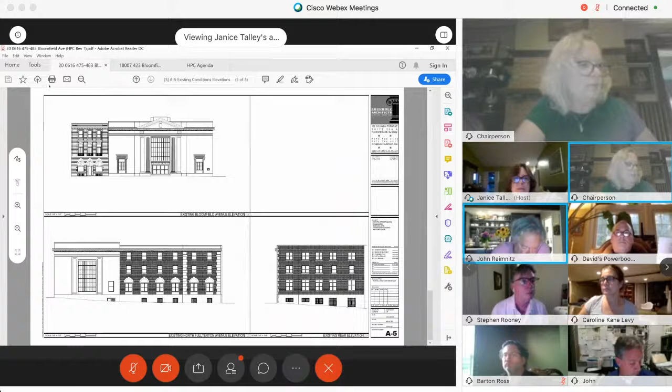is HPC application 2020-14, which is 475 and 483 Bloomfield Avenue. This is a door and window replacement, new awnings, exterior facade lighting, and signage.

Now, we are reviewing this because these two buildings are within the town center historic district, which is basically our downtown Bloomfield Avenue corridor. I just want to make a brief discussion of the building, the significance of the building. As I said, there's two buildings.

The picture on the upper left, the building to the left with the strong horizontal lines is 483 Bloomfield Avenue, and the building on the corner is 475 Bloomfield Avenue.

So 475 Bloomfield Avenue was built originally, was known as the Montclair Trust Company, as identified in the Montclair Times from articles dating the beginning of 1910. So we know that it was constructed in 1910.

The building significance that is in the report is based on new research, and this is what's come of that. So what you see here is not true. It's not correct, let me put it that way.

Going back to the Town Center Historic District nomination report from 2002, it's identified as a 3-story neoclassical structure. And surprise, surprise, it was not designed by York and Sawyer, but by Mowbray and Uffinger, who were responsible for the Dime Bank in Brooklyn. It was constructed in 1910, according to newspaper articles, and is characterized as a contributing building within the Town Center Historic District.

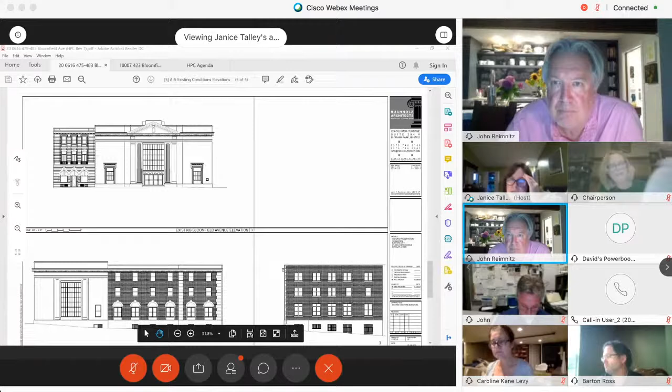Are you talking about Tom Conley's memorandum? Oh wait, I have to unmute. Are you talking about this, member?

Yes, okay. So I just want to point out something else within this memorandum, on page 2, the second paragraph. It says this property was previously approved for replacement windows by the HPC Commission under application 2010-63. A copy of the certificate is attached to this memo.

But I'd just like to point out and have it on record that the commission's decision was to deny the application without prejudice, in a vote of 6, that voted to deny the application.

Basically, what it was about the windows, and the chairperson at that time said that they were not denying the idea of replacing the windows, but the information submitted was incomplete and wrong, and that the commission in 2010 was asking about steel windows as opposed to aluminum windows. So that's in a nutshell what the previous application was.

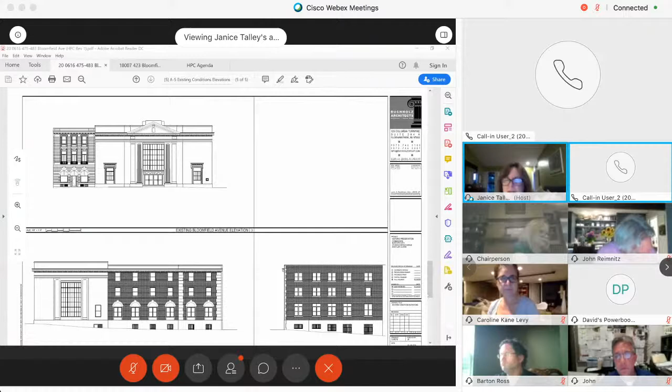I'm maybe here, I don't know if Jen, you can hear me. Who's that? That's David Genova. Yeah, okay, I hear you, David. I'm listed on here as call-in user 201 if you need to mute or unmute me. I'm on my phone, and also on the computer so I can see, because my computer doesn't have a microphone.

Okay, is the architect here, David? Yes, can you hear me? Yes. Can you identify yourself, John? Hi, yes, I'm John Buchholz, the applicant's architect. Do we have anyone else that's going to be testifying for this applicant? No. Okay, so Mr. Hyman, could you swear in the witnesses?

I can do, I have him muted. Hold on.

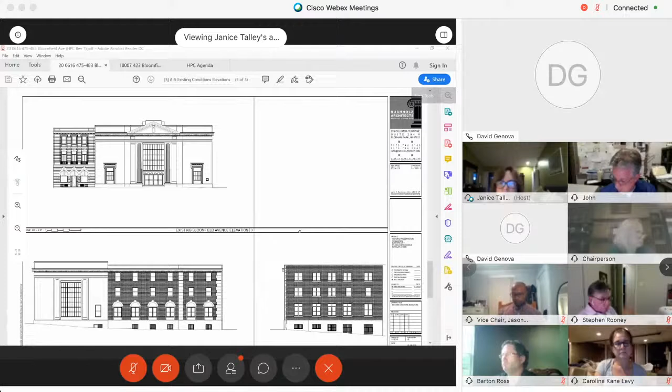So the intent of this plan, and Janice, we will certainly pick up the use conversation, but the intent is to create entryways for people going specifically to the various uses associated with this building. The entryway on North Fullerton is to service the office component of this building.

The facade upgrades on 475 are similar to the facade upgrades on 483, both in terms of style. We wanted to keep the buildings somewhat connected as they have been historically, but also in terms of overall aesthetic and what we were trying to accomplish. We're trying to make the building a little bit more attractive to users that aren't a bank. It's a very specific bank building, and we're going to have to train tenants to not think of it as a specific bank building.

But we are very sensitive to the historic qualities of the building, and certainly the beautiful windows, facade, and stonework. Our intent was not to bastardize those things in any way, not to dismantle anything or come in with anything too aggressive. So that's just the broad overview of our plan and intent. I will let John Buchholz, our architect, go over specifics on each. If we want to start at 483, John, I think that's a good place to start, unless anybody has any questions for me.

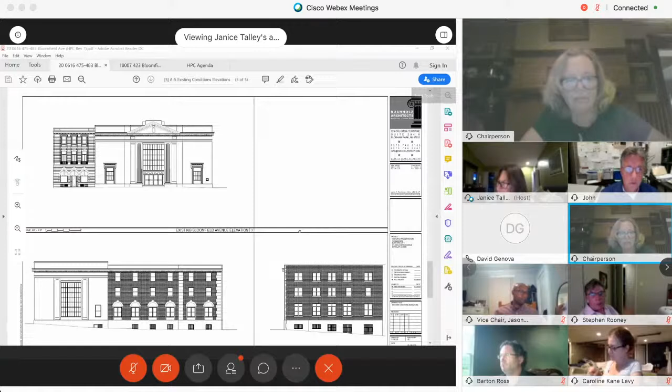Can I just interject? Thank you for the overview. I think it's very important to have that when we look at this, and it's exciting to see this property being thought of. I think the overall look will be very good. But I just want to make sure the commissioners know that we are only looking at the facade of this, the exterior, and how the different things they plan to do will fit in with the historic district. So with that, maybe Mr. Buchholz can start with your plans for the building at 483.

Sure, absolutely. Thank you very much. This building, being the one off to the left, 483, our intention is to restore what's there and change out, as David said, the windows. The upper portion of the building has great historic detail, which we plan to clean - that limestone at the top is very dirty. Our plan is to clean all of that stone with specific chemicals so as not to damage it or do anything harmful. We are also looking to replace the windows.

We have details in here of the Andersen 400 windows, which are a clad product, and provide the wider mullions within the windows. The panels that are below or above them are going to match the windows that are there.

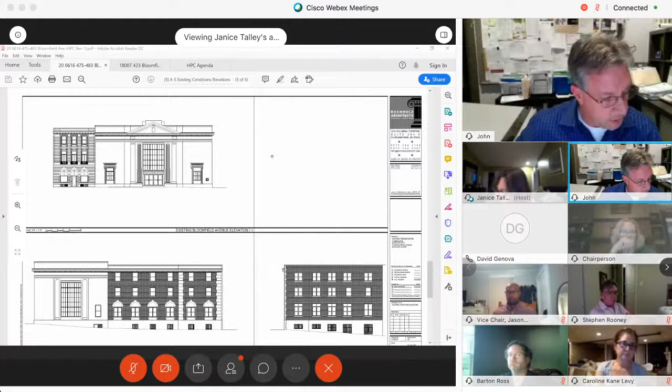Our plan is to also wash the granite base that sits at the bottom, which is very similar in color to the building above. We have similar black iron grills on the lower level windows that bring light into the lower portion of the building. Those will be scraped, repaired, and painted black as well.

So there's really not much more to the facade. It's pretty straightforward: upper stone, granite base, windows and doors, and the black iron are the pieces that will be restored and brought back to their original luster.

Thank you. Janice, do you have a close-up of that building? Is there one in the plan you could show? I think there's a picture that was part of this. Let's see, A3 has a photo. Would that help, the photo itself? Did you want the renderings, or A3 has a picture, Janice? All right, let me get to page A3.

Did you submit your plans on separate pages? Is that it? Corey from my office sent it. I don't think so, it's noting 5 of 5. It seems that when I uploaded what was sent, it's just one page, 5 of 5. No, this is the only one, definitely. Oh, there we go, I got it, definitely more than one page. I got it, okay, sorry. All right, so this is page 1, I was at page 5. So which page do you want me to go to?

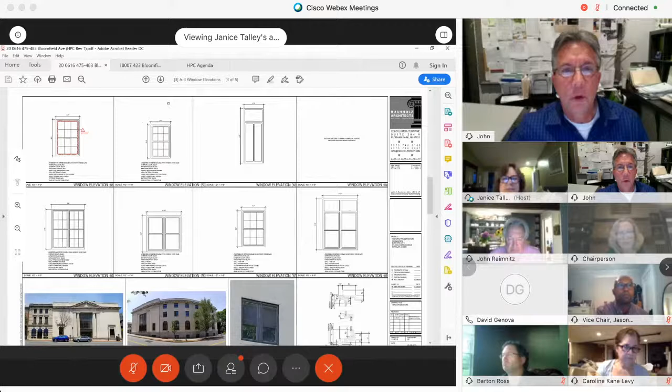It's probably 3. There we go, let's go one more. There you go, see the picture to the lower left. Does that help? Well yes, that's the current situation, correct? Can you make that, blow that up, Janice, at all? Yep, I can. Let's see, right. Do a dynamic zoom, all right, thank you.

And then you just roll your... that went the wrong way. How do I get out of dynamic zoom? Oh, now we all miss the easels. Yeah, there we go, well my computer got a little stuck there. I'm on page 4, we want to go back to page 3.

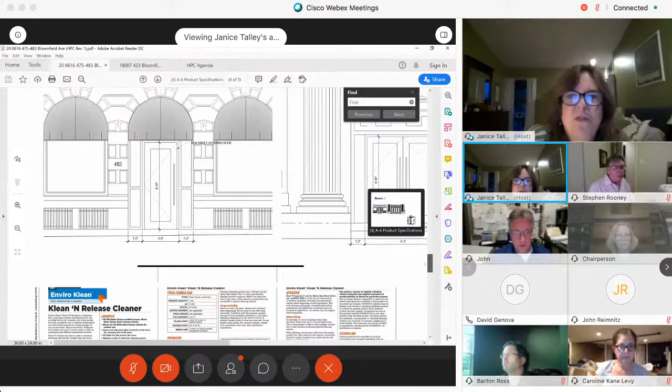This is the actual drawing. Wait a minute, that was a blow-up for a second. Can you go back, Janice? This might help, I think. Is that the chairman asking the questions from before? Yes. To get to page right here, 4, do you see on the bottom there? Chairman, does that help what you're looking for? Well, I thought we should be able to see the whole facade up on the top right. Up, Janice, it was on the top.

There you go, okay. Is there any way, dare I ask? I think you've been spoiled with Graham. I think it's the best I can do.

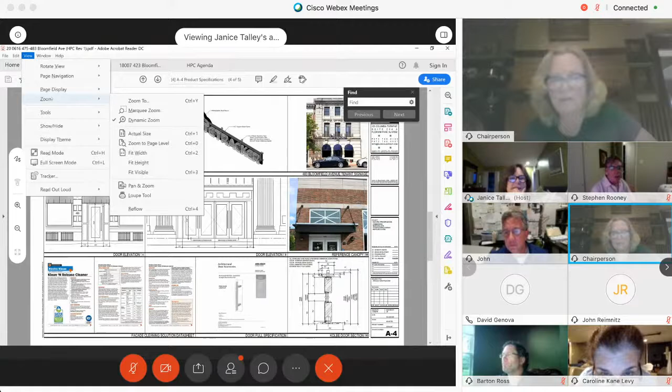Okay, well if everyone can look at this and then maybe look at the renderings that were sent, because we do have those in large format. I have the renderings, I can pull up any of the renderings. Well, this is part of what the renderings were, the plan. Maybe that's better, Janice. Okay, yeah, yes.

Do you have anything else to add to your testimony? No, I think that generally includes the Sitetracker sign as you see it, which resides between the first and second floor, and we kept a uniform line across both buildings. We're providing an uplight, an LED light below the main upper molding, running at the same level between the buildings to uplight that cornice. Other than that, Chairman, for this building, that's pretty much what we are providing.

Okay, thank you. I just have a question about the color. It looks as though it's pretty uniform in color between 483 and 475. Is that correct, or is that just a visual image that you've created here? I seem to think of it as being so.

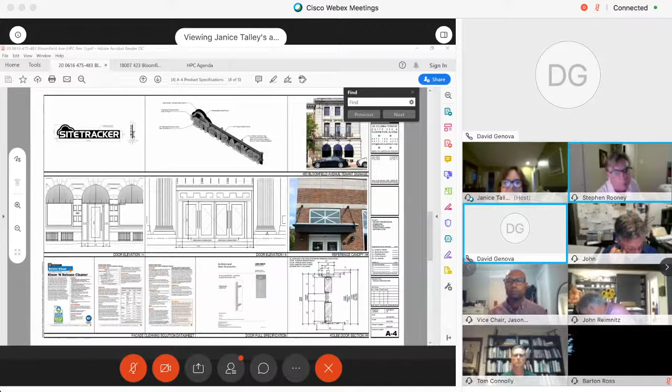I don't know that I can speak exactly to the applicant's intent or the tenant's intent, but they do see a benefit to having prominent signage within the retail zone. Part of it is probably that they think they're entitled to it based on the sign ordinance, so they don't want to lose out on any presence.

If the sign needed to be smaller, I don't think they would have an issue with that if we wanted to shrink it, but it was designed to be conforming. This was their signage intent, what they think they want people to see when they approach the building, both guests, visitors, conference people. We're executing their plan on the signage more so than mine, but I am happy to take comments back to them if the commission has any.

David, I just want to point out, does part of the sign cover the metal awning, or I guess you'd say the railing for the windows above? It probably hits a little bit to the left. I'm looking for my elevation.

It's minimal. Just to back up, John didn't design the sign. This was designed by their signage company, and I'm executing it. The intent was for the cloud to live between the two balconies. If it wasn't referenced properly on the rendering, or if it reads funny, our intent with the sign manufacturer is to make sure it lives within the band, within the void between the two balconies.

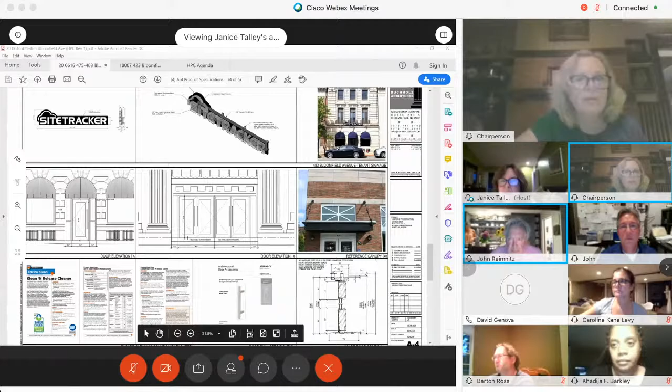So, John, do you have any more questions? Yeah, I'm confused about the entry door into 483. On the plans it's shown as a single door, 3 feet wide, but in the rendering you're showing 2 doors that would be 2'8" wide each. It would be less than 2'8" wide because they'd each be 2'6" wide.

And that's handicapped accessible, individual doors at 2'6"? David, let me defer to you. David, are we going with 2 doors or the single door? I didn't realize there was a conflict in the plan. It was meant to be 2 doors, and the rendering, I believe, is accurate. So I think the rendering drives this, John, not the elevation, and I apologize for the inconsistency.

Well, that's okay. I just want to note, and maybe it's not the purview of this commission, but I didn't realize that 2 separate 2'6" doors would be handicapped accessible. No, we would have to make them 2 3-foot doors, and when we get into the final details we'll make sure that requirement is met.

Well, you can't do that because you have a dimension there of 3 feet with 1'2" on either side. You only have 5'4" in between there, so unless you take away the masonry, you're not going to get 2 3-foot doors. So just think about that a little bit, I don't think that's completely resolved yet.

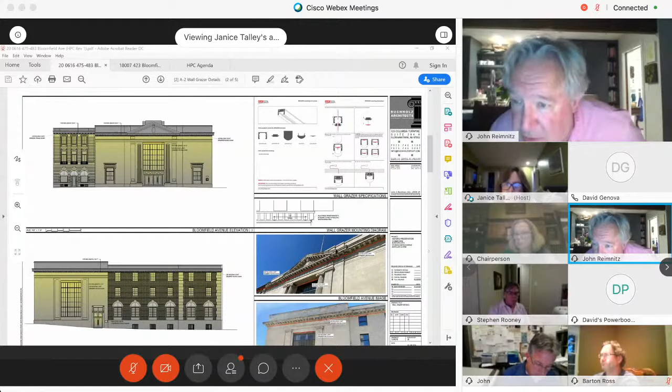Okay, that's all great. I guess I come without all the information of this being approved previously. I'll have to go look at this fixture. Essentially, the intent of what you're showing is great—I love it, I love the wall washing. I just think you're going to see the source as a bright light all along the bottom, and I guess I have to go see how it's been installed in other places.

John, you're not wrong—you do see the source in the buildings I spoke about. I don't think it's an overwhelming brightness or jarring in any way, but you're not wrong that the lights aren't invisible in their other applications. I don't think they overwhelm the buildings, but you do see the strip of LED lights to some degree. I think Bob Silver's building hides it a little more—he's got a deeper cornice so it sits recessed. But the vestry and the Madison building are even more surface mounted than this; they live within maybe a 4 or 5 inch reveal, so they're more visible. I don't think they're unattractive, but your concern is the vestry.

The vestry is your new building, right? So it's a modern building. It is. Okay, that's a modern building, and the Madison is which one? The Madison is the building at 420 Bloomfield Avenue. You've done some work in that building—it's the facade that used to have the Sahana Day Spa, and you did the office work upstairs.

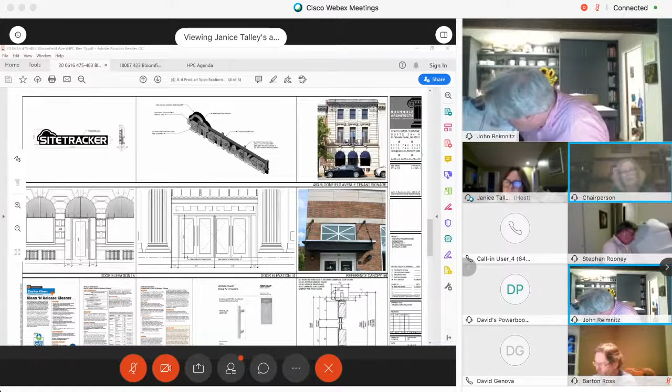On the plans on A-4, you indicate—I don't know if this is for 483 or 475—a Kolbe door section. It's a brand name, right? Do you have any examples, or do the architects on the commission know this name and think it would be appropriate? I know the color is midnight black. All doors to be Kolbe Ultra Series commercial door system. Is that something familiar for an application such as this? It is, I am familiar with it. Yeah, I'm familiar with it too. It's a clad door that'll match the clad material.

Okay, and then my other question is about the awnings on this building that fill the arch. They're already on the building—I understand you're just going to recover them, I just want to point that out. Would we consider these to be bubble awnings, or another type of awning not suggested within our guidelines? I just wanted to point that out while we're looking at this building.

Okay, then. Everyone's asked questions. Anyone else have any other questions of the applicant? I have not had an opportunity to ask questions.

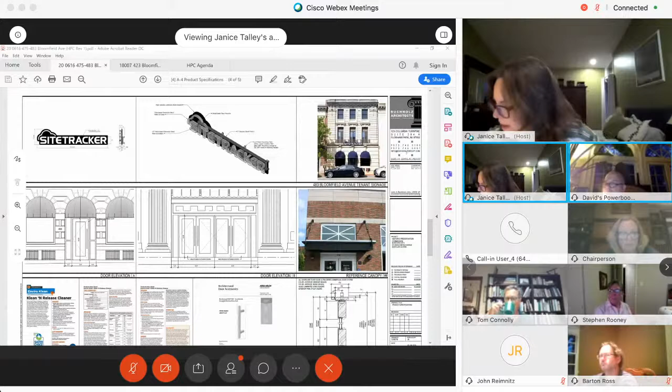David Genova, are you on? I'm on, I'm having difficulty with my computer. You're creating a lot of feedback. Hold on, I'm off the phone, I'm now on the computer. Oh, that's much better. I'm trying to stay on, my computer just keeps going blue on me and I have to reboot. So if I may, Chairman, am I able to ask questions at this time? Yes, please, we couldn't find you before. I was there, but I was intermittently jumping off because I couldn't stay on. Again, my screen just died again. But we can hear you, David. Ask questions, David.

One question I had is underneath the ground floor windows, astride the front door, there are openings. I assume there's light traveling through. Is there a basement or a subterranean area that's getting light from those areas?

There are 2 basement levels in this building. Unlike anything I've ever seen in my history working in Montclair, it seems as though they added a sub-basement, so there are 2 levels underground in this building. The basement you're referring to, where the grills are, will be activated as part of this tenancy. They will occupy some of that space. The sub-basement from there will end up being mechanical.

So the basement level that would be serviced by these grills is going to be like an employee lounge for them, a bathroom. I wouldn't call it back of house space because it's internal to their use, but it's not going to be public facing space. They're not bringing clients or anybody else down there. It's like where their data equipment lives, where their little cafeteria for the office space lives, and where a bunch of bathrooms live.

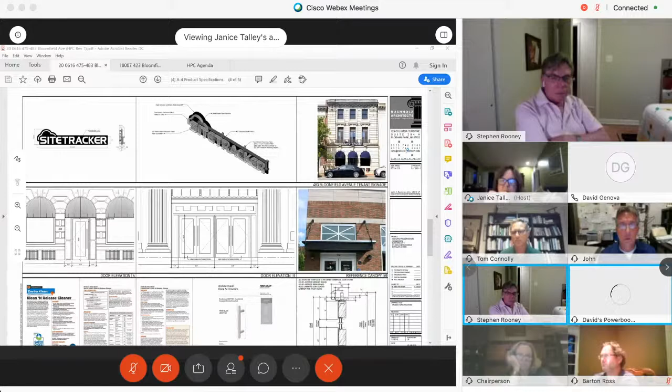My question on the signage - you were talking about 2 issues that were discussed already. The signage issue, I believe, I don't know if I got disconnected, but you had stated that the tenant wished to retain their right to a retail-type signage, but it really is an office tenant.

You had said that you were open to feedback, is that correct? Sure, yeah, we're open to feedback. This was, I don't want to call it a first pass, because we are hoping that we have your enthusiastic support after this meeting. But that being said, the tenant is open to comments on the signage. We did look at a variety of different kinds of signs, including projecting signs, smaller plaque signs, and window or door graphics. Just to give you feedback, the tenant did want more visibility than either door graphics or plaque signage alone, and was hoping for something more like a retail-like sign.

The tenant does have a brand. Sitetracker is the 2nd or 3rd largest construction management software company in the world. They think that brand translates and that people will recognize them, so they wanted some visibility to that. But they're open to projecting signs if somebody wanted that, and I'm sure they're open to this sign being a different size, although it is conforming. They're open to it being smaller if anybody felt it was too large. But they did ask me to move away from simply a plaque or a door sign - they wanted more visibility than that.

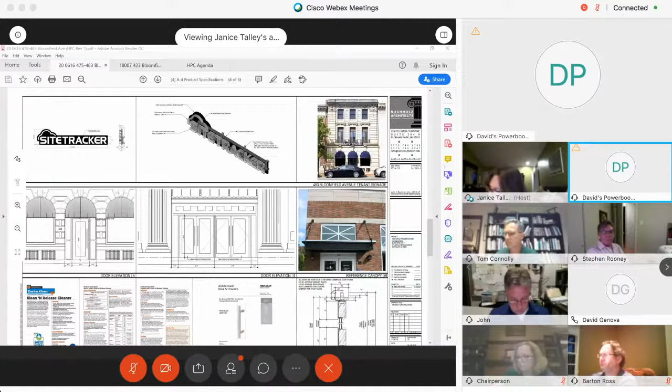The windows that my colleague brought up on the second floor - the question was about the panel above the French door, was that going to be glass? You stated it was opaque, and I just want to confirm - Caroline asked a question, if there's a drop ceiling, is there any reason that has to be opaque? It does have to be opaque in some way.

I'm not opposed to it being opaque glass instead of an infill aluminum panel of any kind, but there won't be an acoustical style ceiling. There will be a dropped sheetrock ceiling, as currently there's no insulation or structure between the second and third floor. This will be an active use when it is happening, with people walking upstairs and sliding chairs. We need to be sensitive to sound between floors, and that will impact the ceiling height on the second floor to some degree. So that panel could be black glass if that's what you wanted, but if it's fully see-through, you'd end up seeing structure and mechanicals.

Would it be possible to set back the soffit of the ceiling and just have— Hello? Hello, I just want to say I'm back, if you can hear me. Yes, and we can hear you. I'm calling from a phone now, my screen totally died.

So you were just saying you're not reluctant to put a glass inset on top as opposed to— I'm not. I don't think it was vinyl that was proposed, I think it was aluminum, but I'm certainly not opposed to putting glass. However, my last comment was you will see structure and mechanicals if the glass is transparent. The glass would theoretically have to be opaque.

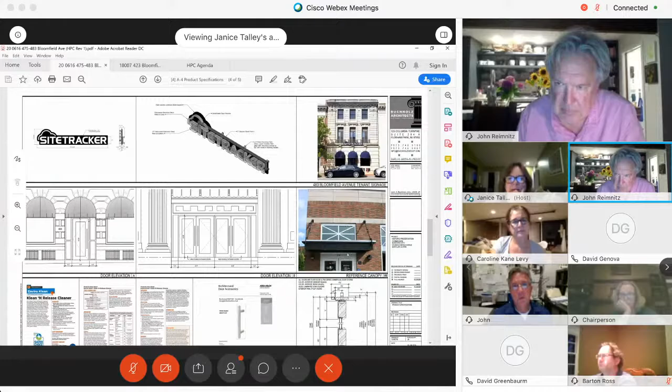To Ms. Levy's comment about moving the soffit back from the inside: it is one long conference room proposed on those 3 floors. I don't know that our tenants would want a separation in their ceiling height in there. There are acoustic panels planned, and there's data and AV equipment going in that ceiling—recessed microphones, recessed speakers. I think we are going to have to keep that ceiling height consistent. I hear the concern, I just don't know how to solve it. I don't have an objection to putting glass, but I don't know that the current plan supports anything that doesn't have some structure between the 2 floors.

Okay, thank you for answering that question. The only other issue I had was on the wall washers, the grazing lights that John brought up. I believe the ones on the PNC building, there's no dent—it's not like they're resting underneath dentil work. What I wanted to understand is the top cornice has a dentil molding along the cornice, and I'm wondering, is there a flat surface? Will this in any way disrupt the cornice, a straight line of LED lights on the top?

I can only speak to the 2 buildings that I had something to do with. I don't know the installation details well enough of Mr. Silver's building to determine how he installed it. But on the Madison building, which I installed, and also on the Vestry building, both of those are affixed in a similar manner to this, where they are affixed on a cornice as a surface mounted fixture that washes either down or up.

Sorry, yeah, whoever's looking at their plans, keep it away from the microphone because it's disrupting the audio. Are you talking to me? I don't know who's moving plans. You got to keep it away from— not me. The microphone. Yeah, so David—

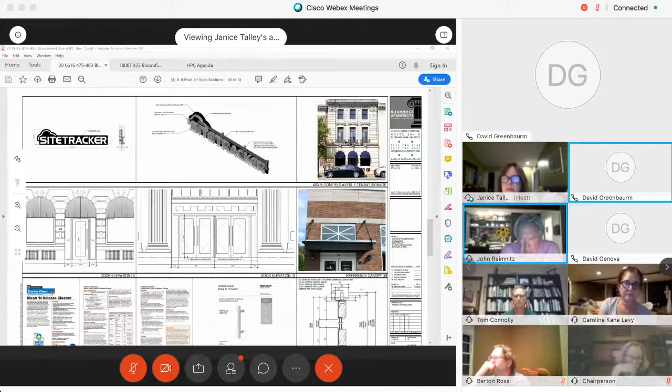We had conceived— David, John, I'm sorry, go ahead. No, I just want to say my issue is not so much the fixture at the moment. The question I was asking is because unlike the other buildings where there's a straight cornice, as opposed to—actually, no, I take it back, it's the building next door that has the dentil work. That's my concern, of it shouldn't disrupt the cornice, the dentil work of the cornice. And I'm actually thinking of the building next door, so we'll hold off until the next conversation.

So I'm not raising any issue other than how it will work on this particular building, not the fixture itself. Understood, okay. And I don't have the visual right now, so yeah.

Thanks. So if there are no other questions from the commission members, could I ask Mr. Connolly to refer to his memo and just go over what your comments were concerning this building, 483?

So for this specific building, I think we touched on a majority of my comments. The only two remaining ones: historic photographs seemed to show two sconces on either side of the facade at the first floor level. There is scarring currently on the building, so I would throw that out there as a suggestion. Maybe those could be reinstalled.

What historic photos are you talking about? In the district nomination report, there's a historic photograph. That wasn't part of the packet that came through, and it's hard to make out. So Tom, can you describe where they would have been? Is it in between... No, it's on either side of the facade at the extreme ends, not on either side of the main door. They do show up in the historic photograph, and there are scarring remnants of a base plate and a hole for where the conduit went in that has been infilled.

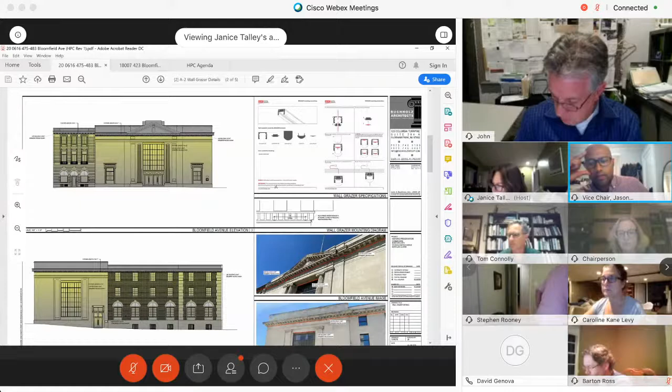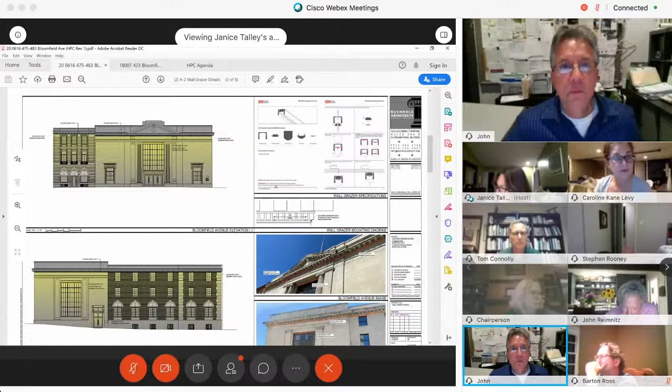So I would have to... David's back. David has landed. Keep coming and going, I'm sorry. Okay, who's next? Kathleen? No, John. Oh, David, who's next? Who's next? I'll comment next.

I think, even before you found that photograph, Steve, I would have said 1/1 on the top, on the third floor windows. That's really the correct sort of arrangement for this style of architecture. A lot on the Upper East Side in townhomes and so on, and it's really correct.

So I would support 1/1. I don't believe that you cannot solve the second floor transom as glass. There's some depth there, there's some detail that can be done. People are very creative, I'm sure the architect is very skilled, that you can make that glass.

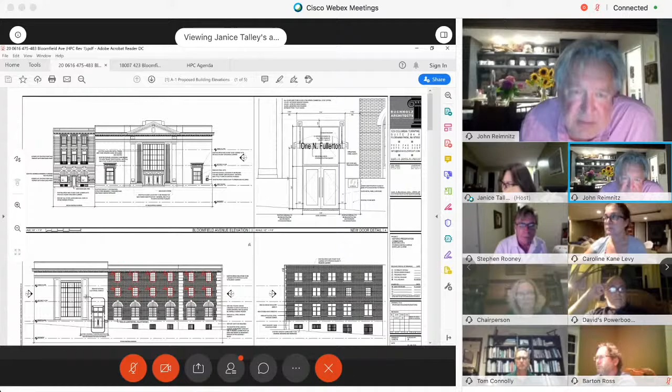And then finally, our two final points: I would like to understand whether this is one door or two doors at the entry, what we're approving. And that we are restoring this stonework, especially along the bottom, where we're filling in cracks with composite material, matching existing mortar, and I would suggest that upon that there be samples done for approval of members of the commission when you get around to that point of doing that. Those are my comments. Okay, thank you.

David? Okay, so I strongly agree with the idea of using a glass insert above the French doors on the second floor. I have no trouble with it being opaque.

So that's a definite. I have a view of the building now, so again, those down lights, the grazing lights - now that I'm looking, I just want to make sure it's on the record that the light should not in any way interfere with any of the motifs or ornamentation. Because this building has basically the horizontal banding, and if there's like a little bit of a trophy hanging from the top of the cornice or from the kind of capital, I just want to make sure...

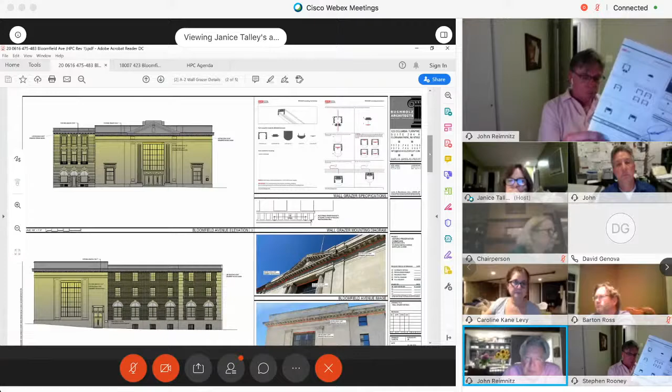Are there any other discussion points before we move on to the next building? I'd like to go back to the lighting for a second. If you look at the lighting plans on sheet A2—it's also shown on sheet A—you get this grazing building light, but you lose all the detail at the top of the building. If you look at the two photographs on the lower right, you lose all that dentil, you lose all the pediment. It seems backwards—if you want to show off the features of this building, you'd want to light the top of the building.

What does Mr. Silver have on his building? Because there's a dentil molding all the way down the street. I don't know—he has both up and down lighting on his. He has a ledge that sits similarly to the bottom of these three windows, and he also has a cornice that sits similarly to the top, with dual light grazers there. I think Paul Sionis, who designs that building, is on our list—if anybody wants to ask him a question, he could clarify that. I believe he has both of those light sources kind of meeting in the middle, so it's a full wall wash.

To John's comment, I would like to rescind the way we've proposed it, and instead have it on that ledge pointing upwards. I think that's a better solution.

I don't know why we didn't come up with it in the first place. I think it's partially because we were trying to marry the two together, but I like that as a better option if the commission does. I think that solves the problem Mr. Reimnitz brought up, and it's a more discreet way of installing those lights so they're not interruptive of the facade. Great, okay, great.

So why don't we list our conditions now for this building before we go forward? I've been keeping a list. Janice, do you have a list? Graham usually keeps the list for us. No, I don't think I have all the items. Okay, alright. So why don't I just recite what I've written down.

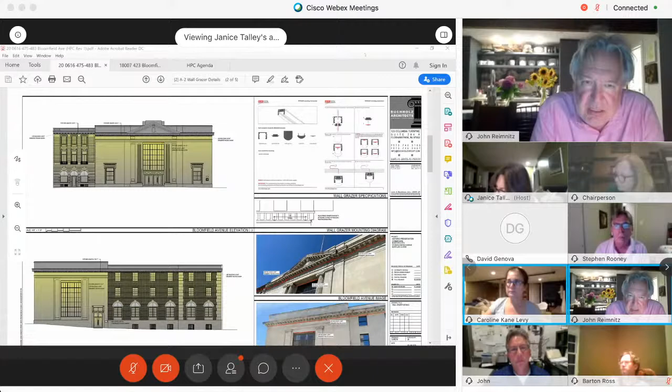One other couple - that the top transom of the second floor windows is either glass, or I would say back-painted black glass or something. Spandrel glass? Yeah, like a spandrel glass, so at least you get the reflective qualities, so it's not aluminum - so it looks a little bit more like glass.

If I could just comment on that point - with the commission's permission, I will review the interior drawings and see what we can do to accomplish clear glass. If we can accomplish clear glass, I will accomplish it, we will install it. That's going to be a great conference room if you can get that glass up there. It will be fabulous, spectacular, I can't believe it.

They won't - John, just so you know, part of the reason is not just the structure of the ceiling, but they have a number - I don't know if I said this earlier, I apologize if I'm redundant - they have a number of components that are being hung from that ceiling. They have acoustical clouds hung so it's a softer sound, and microphones and speakers and all types of things happening in that ceiling.

So it's not just the structure, I have to solve a couple of problems. But if I can, I like the idea of these being full glass too, so if I can, I'm happy to do it. My suggestion, if we formulate that condition to being that it is glass, is that when I come back with the sign, I will answer the question as to whether or not it's opaque or clear. And I'm asking for a little bit of trust to understand that I will try my hardest to make it clear. So that will return to the revisions committee as well.

Yeah, I'm fine with that. I'll bring back what our solution is to that issue, as long as we can just call it glass in the condition and not make a condition of it being clear at this point. I will try, and I will bring it back to the revisions committee.

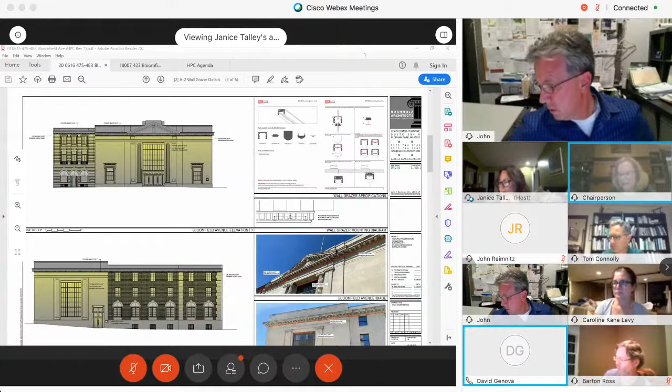It becomes like a ghost sign, a true ghost sign. Okay, so how does everyone else feel about that? Should that be one of the conditions, that the remnants on either side, the visual remnants, remain? Unless you're changing the original - the signage by the doors was all pin-mounted stuff, not plaques, and I don't think you see any scarring from that. I would just make it disappear - you can see this stuff in the original photos.

So what is the consensus - is it not to try to maintain this scar? I would fill them in with composite material to make it match. It's already been filled in. I'm just saying make it disappear, not... Yeah, okay, that's fine. So Janice, have you been keeping a list of this as well?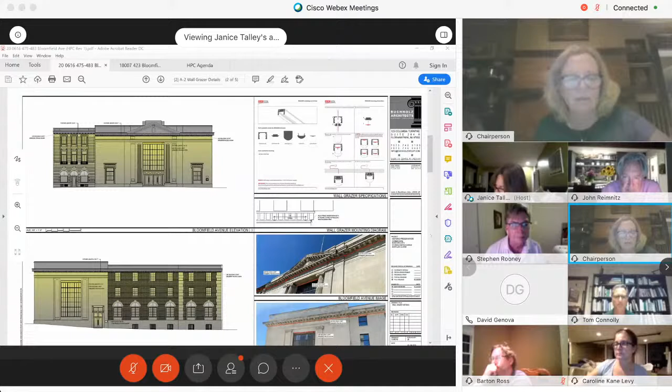Okay, so why don't we move now next door to 475 Bloomfield Avenue? And Mr. Buchholz, if you could give us a description of what you intend to do on the three facades of this building: the one on Bloomfield Avenue, the one on North Fullerton, and the rear facade that goes into the entryway of the parking lot. Sure, I'm going to stick with drawing A1 in the upper left.

We have the Bloomfield Avenue elevation. Basically that facade is mostly stone. We are going to clean, point, and repair that facade as necessary. We will color match and stipulate to providing samples, as we are doing for the other building's stone. The architectural details will be cleaned, the columns, the cornices. We are removing the steel grates on the first floor windows in this elevation. The existing plaques in the front of the building are going to be removed, but we're going to use similar materials to match the existing plaques once we get tenants in there.

Our plan is to remove the existing doors on the first floor that used to go into Chase Bank. We are going to leave the windows up top. We will scrape and clean the metal frames, repair them, and reglaze the existing windows if any are damaged or broken in that location. The rest of it, the base granite, will also be cleaned. So basically it is cleaning, repairing, and restoring portions of the building, new windows, and removing the grates on the first floor and repairing.

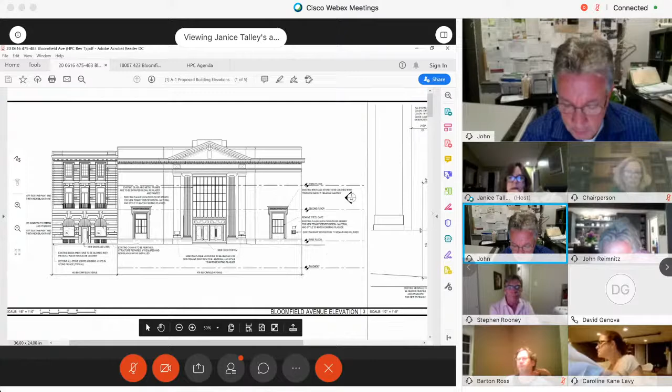Janice, do you want me to just continue going around the building? Actually, John, can I clarify a couple quick things on that? There is one note you didn't bring up: we are replacing the door system underneath that large center window with a similar door to what we're proposing for 483, the Colby door. And to your point about lighting, my enthusiasm for the uplighting is kind of unique to 483 because of that ledge. There is not a similar ledge on 475.

There are two ledges above the two ground floor windows. Those could get a fixture on each one, pointing up. But right now I'm of the position that the lighting as we designed for this building works better than it did on 483, and I'm hoping the commission agrees. If not, we'll come up with something different. We can bring that back to the review committee if we do something different. Thanks, David.

I'm going to turn to North Fullerton Avenue, elevation 2, bottom left-hand corner of A1. The building turns the corner to the left, so the same materials will wrap straight down. Is this it? That's it, right there, right? Yes, yes.

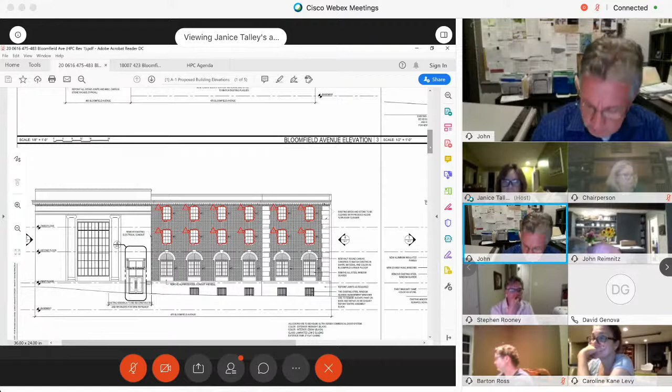We then venture into the section of facade that is brick. That brick will also be cleaned. We are going to clean the stone details along the top, the stone running up and down the facade towards the back. We will be cleaning and repointing the stone base.

We are removing the grates on the first floor windows, but leaving the grates that go to the basement windows. They will be scraped and painted black again, and that area will be cleaned.

We were looking to replace these windows using the Andersen 400s with this pattern, which we can go into conference later and discuss. We were bringing the other building and this building together with the same panel system and the same mullions, so we can discuss that when the committee wants to go through that portion.

Janice, if we can move just to the right, which is the rear elevation that fronts the entrance to the deck. In this case, the stone slightly turns the corner, and that will be pointed and cleaned. There is brick across the back, and the bottom is brick that is painted, which we discussed earlier. We are looking just to paint it again.

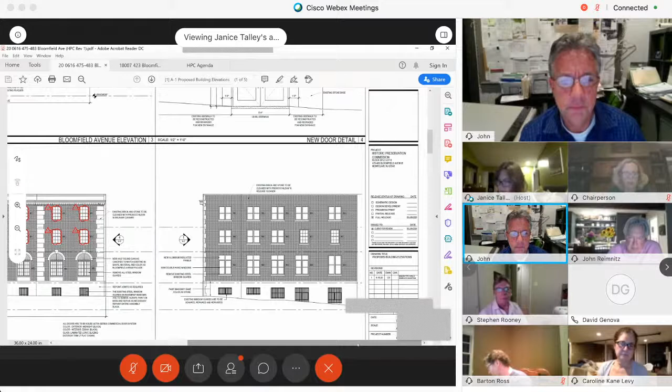If I could just clarify a couple things that Mr. Buchholz brought up: one thing to note here is this entryway on North Fullerton serves a couple different points. One is we need to figure out, as I mentioned earlier, how to get people to the office space without going through the retail.

The second, which John brought up, is important: this building has absolutely no ADA entries or exits. There are steps to any way you would currently get into this building. So from a permitting standpoint, and our ability within code to do what we need to do, we have to solve that problem with this level of renovation plan. This was, I think, the only sensible location we could find for that entryway that made sense both for circulation and for ADA. That is where the location of this came from.

Going back to the windows on the right and the brick: one of the things on the elevation that John's office created, which you have in front of you, is that it's not misleading exactly, because it's drawn the way it's supposed to be, but it looks a little different than reality. Because of the brick, it looks as though there is a differentiation between the back building and the front, as if the back part is somehow a different color. But when you look at an actual picture of the building on that side, the color goes all the way to the rear. This is just a material note on the plan that makes it look different in an elevation, but it doesn't look different in a rendering. I just want to keep that point noted.

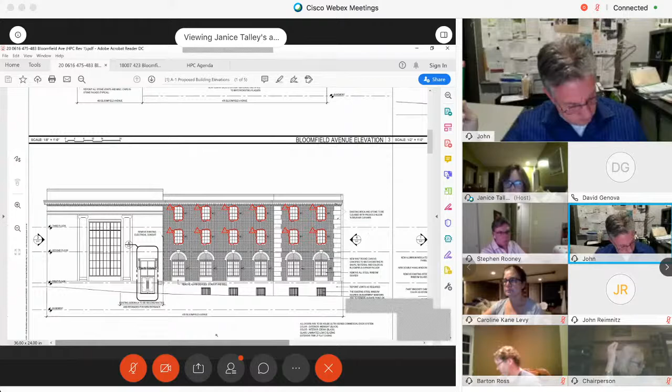One other thing John may not have brought up is that we are proposing to add canopies to those windows on the first floor, similar to the ones that exist on 483. There are two reasons for that: one is we wanted to tie the office components of this building together and differentiate between office and retail, which we thought would be helpful. The second goes back to my first point, that there isn't a dimensional differentiation between the front and the back of this building.

I was in front of this commission, now it's got to be 11 years ago, 10 years ago, for a building on the corner of Bloomfield Avenue and North Willow Street called the Phoenix Building, which has a taqueria on the first floor and Arthur Murray Dance, that red brick building on the corner there.

One of the problems we were trying to solve was creating a distinct office entry, so people didn't have to say, at the time the tenant was Elevation Burger, 'Hi, I'm a lawyer and I work above Elevation Burger' or 'Hi, I'm an architect and my office is above Elevation Burger.' We felt creating that rear entry and differentiating the facades created the optics of there being an office building and a retail building. Because the brick and stone don't differentiate in color, a dimensional differentiation helped, and tying in the awnings on 483 was our solution. That's the spirit of what we did there.

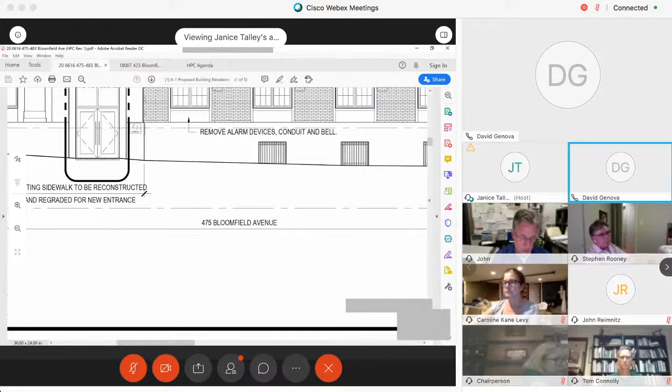In terms of the grates being removed from those windows, that's really a tenant-driven exercise. The first floor of those windows will have people in them. We hope those windows will be more active than when it was simply a bank, with windows to the back of a teller or something like that. These may be offices, and people will be using them, so we're hoping those windows become more activated. We don't think there's a need for grates on that facade given the change in use from a bank to something more traditional. We plan to keep the grates on the basement level for security and safety, so no one can walk by and kick the glass out. But that is the intent on this building.

We tried very hard not to touch what we thought were beautiful components of this building, in terms of the windows and any of the decorative stonework, and we tried to limit our impact on the building as much as we can. But I wanted to enunciate the fact that there are some strategic-driven things on this facade that I think help guide people in the right direction.

It's part of the reason why we put a new address on that side of the building instead of saying we're going to work in the back or rear or upstairs of the old Chase Bank building. We saw that being the narrative if we didn't say 'I work at 1 North Fullerton' as opposed to 'I work above the old Chase'—remember the old Chase, not the new Chase, not the Chase across the street, the old Chase. I just thought that was going to be problematic. So that's just the intent of what we did here, and I thought that might help people understand our position on that.

David, I have a quick question. Can you hear me? Yeah, David? Yes, I can hear you, Janice.

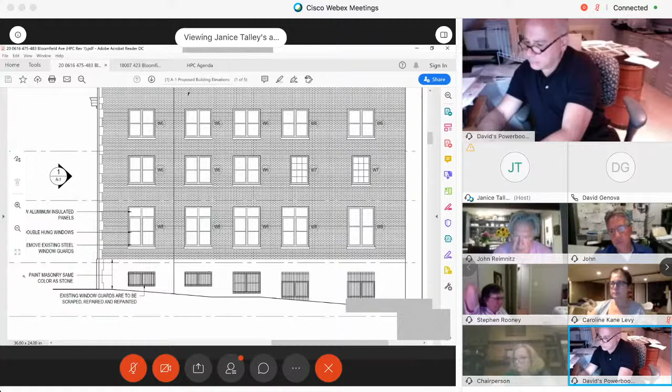My question has to do with, if you're trying to provide handicap accessibility, shouldn't the entrance be located in the back of the building where the handicap parking spaces are? We don't have any parking spaces in the rear—I guess the public parking spaces are in the back, but given the grade of this building, the back would be coming into the basement, and I don't think that's an appropriate entryway for what we're hoping to be a premier, Class A office building. I think you'd run into similar problems saying 'my office is in the back on the garage facade of this building.' I anticipate that being confusing for guests and visitors.

Do you have any property along that back facade, or are you right on the property line? We're right on the property line—there's a sidewalk, so you can't enter there anyway.

Kathleen noted there's something about providing handicap accessible entry at primary entrances—you don't bring people around the back. So there's something to be said for making that the right thing to do.

Well, I have a question. If you go back, Janice, why do you have the windows outlined in red on the North Fullerton side?

Right, because they're right there. David, I think we changed those... I don't know how it happened. There was a revision set that was sent that had a couple of errors. Yeah, these are not the drawings I reviewed.

The windows have changed. Right. So I don't know, this seems to be the first thing we sent in, and then we did send a clarifying one in. The way it's most noticeable is in the rear elevation, where only 2 windows have those dividers. That was not intentional, and we corrected that in a revision that we sent in.

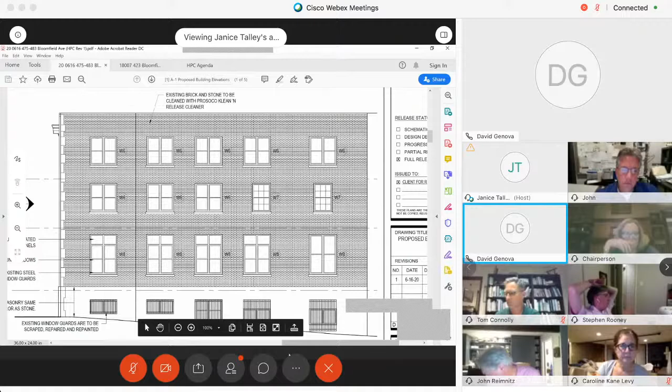But it can also, we tried to provide... I don't remember where I saw it, it's not the master plan, but we tried. I know that simulated divided and true divided lights are normally what I'm in front of this commission arguing about, so I tried to solve that problem before anybody brought it up. But I'm not wed to it.

Okay, I just wanted some clarification on the plan, so what we were looking at is what you've submitted on page A1, which are 1/1 for the third and second story, and then on this plan it has multiple muntins, 6/6, but they're all to be basically 1/1 double hung.

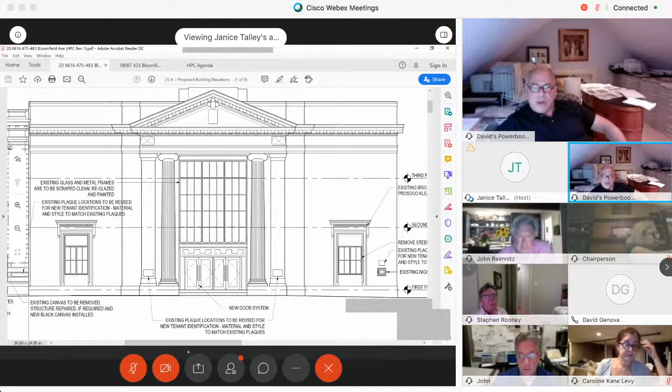Well, we're not proposing to change those windows at this time, mostly because the tenant for the retail doesn't exist yet. So I'm open to exactly what you said, but we're not working on the interiors of those spaces, and I'd prefer not to make design changes yet for a tenant that I don't have clarity or vision on. But it's a good comment, and we would certainly come back with something like that once we have clarity on what that tenancy is.

Okay, so that would be something to put in our discussion for future reference. We would like to see that. Ideally, that would be something I'd bring up. Yeah, we're happy to see that also, David.

And the lighting you talked about, just to clarify, you had thought that maybe above the cornice, above the console, you would have uplights above the console, because there's that void negative space above the console bracket, above the window. You were saying that you would uplight that going up. Is that right? Is that what you said?

Yeah, it wasn't proposed in this application. I'm happy to do it, but I don't know that it solves the same problem or creates the same level of illumination and beauty that we're hoping to achieve. I think it's a compromise because the decorative details don't exist underneath this cornice in the same way that you pointed out on 483, which was a great comment, and I'm glad to incorporate it. I'm still fairly enthusiastic about lighting this building the way we proposed it, but I would add lighting to the top of that to go up. I don't know that it needs it, but I would like to see the lighting come down and really wash the walls of this building.

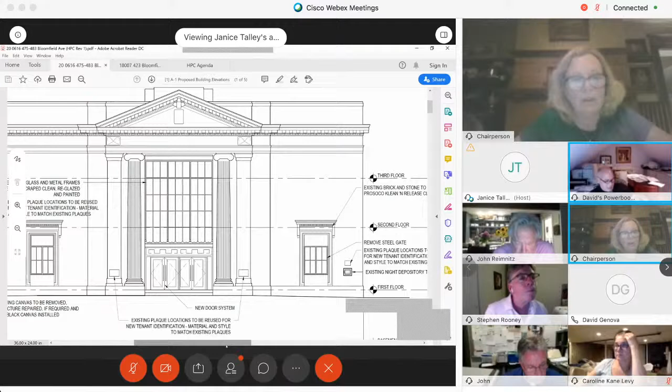Thank you. Mr. Reimnitz? Okay, to keep on with the lighting, there is a horizontal line below the dentil work. Looks like it's a couple feet down. There must be like a 2 or 3 inch ledge there. It seems like to me that's a perfect, can we, I'll put it in terms of a question, can we put lighting there, uplighting the dentil work?

And then I would, I'm sorry, go ahead. Oh, no, I'm looking at it and I can't share it with the commission, I apologize, but I'm looking at a very close-up image of this facade on my computer simultaneous to our conversation. It's very shallow. I don't know that a fixture fits in it. If we can source something more like an LED strip that doesn't have a housing, I think we'd have more success fitting it there. But I don't see a traditional light fixture fitting on that small ledge.

I'm just looking at a current picture of the building, and it is really shallow. It's essentially like a piece of trim, really like 2 or 3 inches as you described. With any conduit runs or a housing on the fixture, I think it will become proud of that ledge. David, Janice, put up the rendering, which helps. Yeah. Oh, there we go. I never saw that.

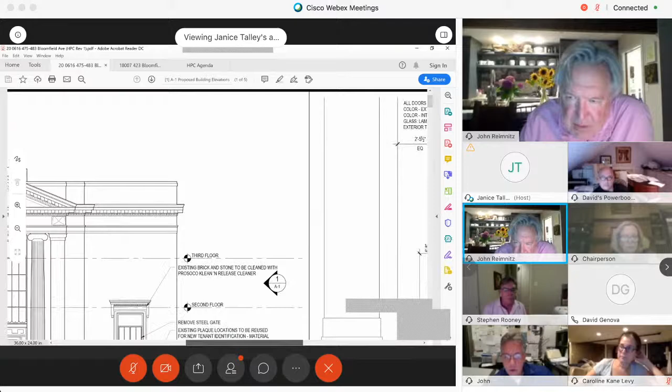I'm not going to, that's just a question. I have some other questions. Right there, which one? The canopy with 1 Fullerton address on it. I thought the maximum size of canopy lettering was 6 inches for this type of lettering. You're correct, John. I was going to raise that issue. This would require a variance.

I have a question about this side facade, the stone versus brick. Starting with the stone, you said you're cleaning it. When I went to the site and looked carefully where it turned the corner at Bloomfield, someone has done some cleaning there and the stone is almost white. It looks to me like all the other stone is just dirty. So is the intention to really clean the stone on the limestone facade, along the dentil work and down the quoin stone where it's laid up like quoins? Are you going to clean it down to the stone, or just clean it?

John, I'm looking at a recent image of this building, within the last few months, and I'm seeing what you're seeing. I'm not responsible for that work, I didn't do it, so I can't speak to what was used or what was done. In the image I'm looking at, it looks as though these might be limestone replacements that happened at a different time. They are candidly distinctly different, but I don't know how it was achieved.

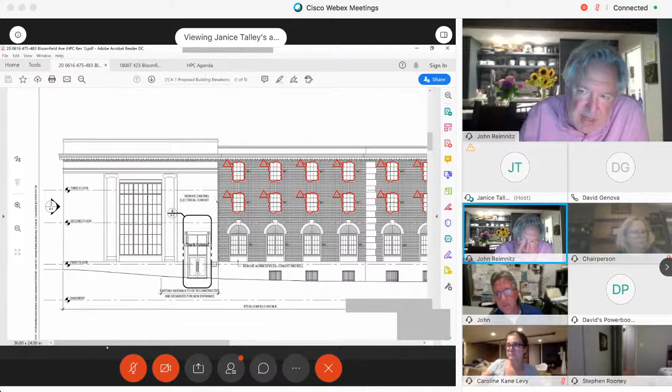Oh right, good point. So the stone is really that color. That's my question - are you really cleaning it down to get clean stone? That's the goal, yes, that is the goal. Okay, and you would do the same treatment going down along North Fullerton - there's some stone work that flanks brickwork down on the right. Yeah, there's like a pier between the two. We would do that too.

It's a quoin. Okay, and the dentil work above. And then what, the brick would remain painted? Well, the brick on the Fullerton side, as far as we can tell, is actually not painted - that is the color of the brick. Oh great. The brick on the rear facade is painted to match the existing color of the brick.

Okay, next question. On the rear facade, I see a note at the bottom about painting the bottom masonry to match color stone. What does that mean - what stone, the taupe multicolored polished stone base, or what? Well, if you're looking at the rear facade and you see four window elevations, and you look at the grade elevation at the bottom, that is currently like a smooth concrete finish. It's not brick like the upper three levels.

It is currently painted to match the brick. Our intent was to leave it that way, to not differentiate between that base and the brick the way it hasn't been differentiated for some number of years. But there is a differentiation between those materials. Mr. Buchholz's elevation is accurate when looking at this image - it's just like a smooth skim coat on the bottom. It says paint masonry, same color as stone.

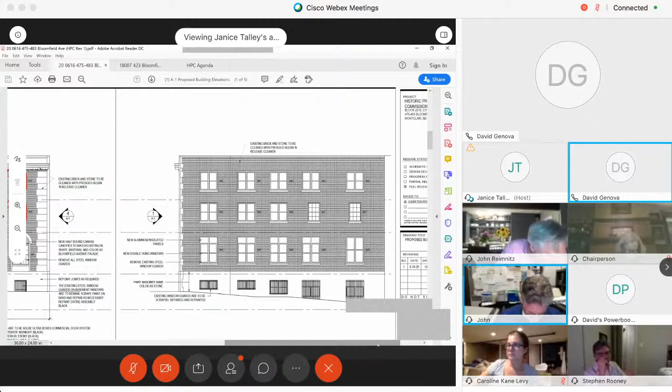So what I'm trying to understand is, same color as what stone? David, I think the limestone that is adjacent, which is what it is now. It's basically to leave it the way it is now - leave it the way it is now, because adjacent is the polished gray stone to the left.

But okay, you're gonna leave it the way it is? We're not painting it gray. Okay, that wasn't clear to me.

And then along this, it looks like this has been stuccoed over, this little masonry base. I can't really tell what it is, but there's a lot of spalling and cracking. I'm assuming you're going to resurface it and make it look beautiful. We are.

The only other question I have is about the entry closer to north, to Bloomfield Avenue, the new entry you're cutting into the existing stone facade, or enlarging an existing opening. This is an entry that directs people to the third part of your three different elements, which is the brick building to the right. If we said... Correct, that's right.

The core lives right inside that door. The elevator and stair core does, and then everybody will move to the right, which is more of the office component of this building. Got it.

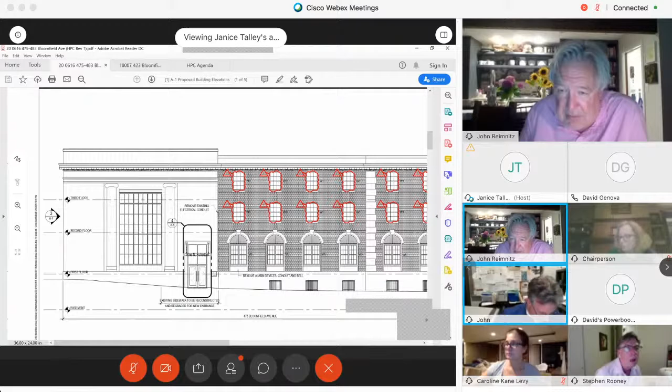Part of that? We did. The building is double height where we come in at this elevation, so it allows us some flexibility on creating the stair core and the elevator that we're doing.

Moving it over to the right interrupts the structure of those 3 floors in a different way, and would be expensive and problematic for us to solve there. But where it comes in now is an existing double height cavity that we can construct that core out of. Got it, okay.

I have no other questions at the moment. Mr. Rooney.

Is the intention of having the 6/6 windows throughout to match the complicated window patterns on the main building, the retail building? I wish I was smart enough to have thought of that. I don't know that that was actually the intent. No, I mean, I'm just being honest with the commission. The intent here was to not get rejected on a 1/1 and to try to solve that problem early on in the conversation rather than later.

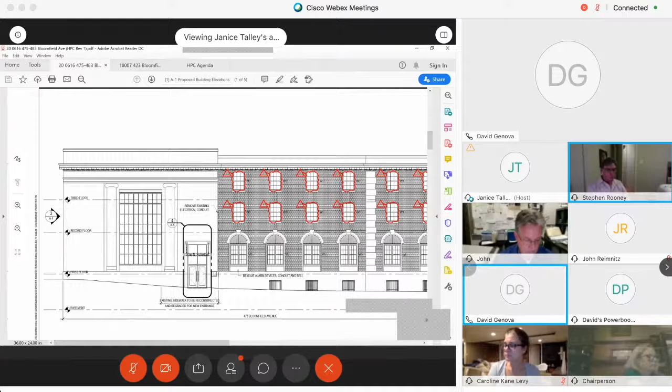So I take the commission's advice on how they want to see these windows seriously, and whatever anybody's comments are, we'll try to incorporate them. But no, it was not specifically to match the larger leaded glazed windows. Sure. Okay, that's my question. Ms. Kane-Levy?

Caroline? Yes, hi. I just have one question. The monumental windows in the main portion of the banking hall, they are amber glass, and you said that you're reglazing them. Are you just repairing them and keeping the amber colored glass, or do you have an intent?

I'm looking at John's note on this right now, and also my close-up version of this building. There's nothing that's broken right now. We're only reglazing in the event that there's an issue with these windows. The intent is to maintain them, keep them, and restore the structure of them.

Anything that we did would be historic to the window. We would not have any differentiating panels within there. So if one were to be broken or needed to be repaired, it would be done in like kind to what's there now. Okay, great. I guess that's my only question.

Okay, thank you. Jason, Mr. Hyman, do you have any? No questions. Okay, I have a question.

On the front facade, the front door, there's 3 handrails that exist now that are painted gold. They don't look like they're original. What do you intend to do with those? Do you intend to keep them? No, we intended to remove those. You intend to remove those.

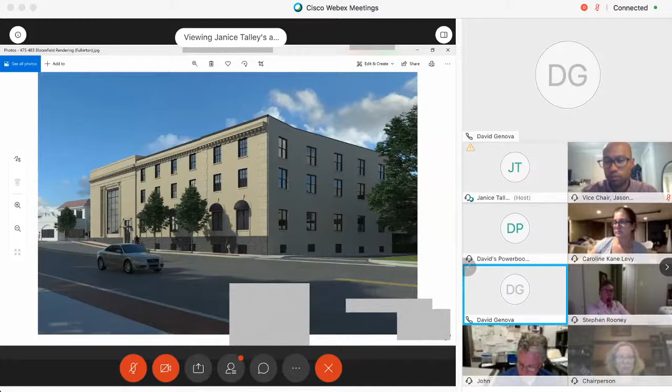Yeah, again, on 483, I really appreciate the comments and suggestions. On this one, I tend to feel as though where we placed the lighting is the right place for it. Not as an architect necessarily, and I'm not trying to be a historic preservationist. I think just from the overall appeal of the building and guiding people in, it seems like the right treatment to me.

I would have an issue with not lighting the brick part of the building at all. If you told me it could be two different levels, that's less of an issue to me, but I don't think the back part of the brick can just be dark, because it does have a specific use, and we want to make sure we illuminate it. Being that there are no other levels than the top, I would like to see it applied there, which, if it means doing that all the way around, that's my idea. If it means changing the light levels on the front limestone portion of the building, I'm open to that, but I would like to see it maintained in the cornice detail on the brick part of the building.

Okay, thank you. And then I have a question about the awnings, which maybe is directed -- I'm trying to find where our awnings are in our guidelines about those awnings. On page 77. So is this type of -- I mean, the one on the building, the smaller building, they're existing. You're proposing to add new awnings. So if you look under number 17, where it says select awnings of traditional designs, it does say arched awnings are appropriate for arched openings.

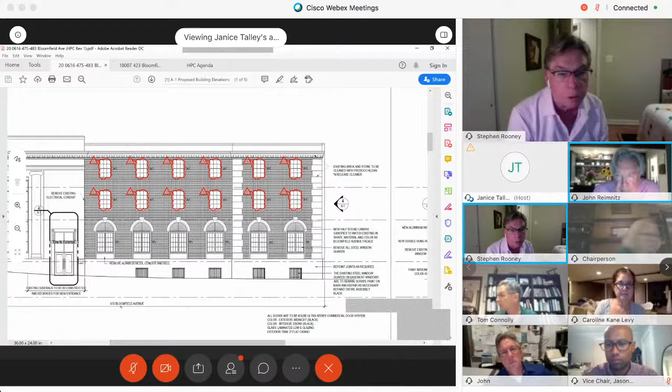Is your point, John, that they're original to the building and that they should stay? Well, that's going to be a comment, which is yes. Okay, especially if you don't know who your tenant is going to be. I don't know if they certainly wouldn't take away that. If you go to this building and you walk around it, that ironwork adds a lot of detail. Yes, the little detail on the top of the ironwork is really nice. How it's brought -- I realize maybe, from the inside, the argument could be made you don't want to feel like you're behind this jail-like ironwork, but I think it adds a lot to the character.

Did we have any photographs of that ironwork that could be shared? I don't. Jen, was there photographs of the ironwork? It's a picture. I don't have the picture. No.

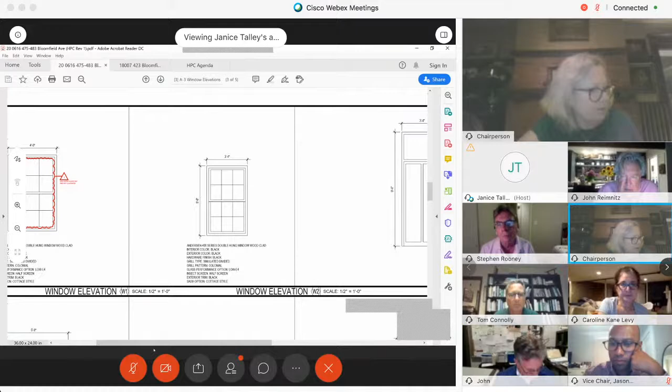And this isn't a question, it's a statement, but the ironwork that's on the two windows on that Bloomfield facade and the window -- the big window on the other side seemed to be original, because you could definitely see there were bars on the part in the back where the brick is. It's not decorative ironwork, they're bars. Right. Now this ironwork was added when they did the additions to both sides of the bank. Right, but that was in the 1920s, correct? Probably in the 20s, yeah. Right, because these pictures are coming from '35. Yes. So okay, that's a good point.

We have to move along with our discussion so we can start testimony for the next application by 10:30. So can we start with Mr. Connolly? Well, wait, before we do that...

Tom, on your comments, are there any additional comments that refer specifically to this building? No, I think we've touched upon everything.

Similar to what we discussed about the other building, the masonry work was fine as long as it's done sensitively, with mock-ups involved in any repointing. My first comment was about the steel window guards. I felt they were character-defining of this building and the type of building that it is, so I think they should remain and not be removed.

Yeah, everything else we've somewhat discussed with regards to signage and lighting. That's pretty much everything. Okay, thank you.

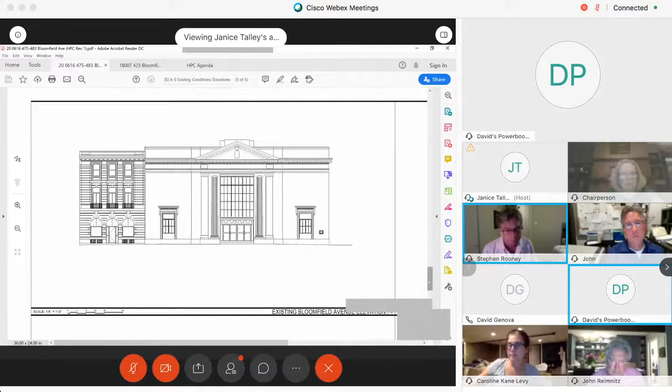The other thing is, since we've talked about the previous building, is that already memorialized and done? I had a thought I wanted to raise before we close this application: the windows on the third floor of the Beaux-Arts building could also be split vertically instead of 1/1 double hung windows, to be consistent with a traditional Beaux-Arts building across all stories, like in a mansard roof. The original 1935 picture shows 1/1 windows. That's fine, but it could be changed. We're not redesigning it though.

Anyway, okay, anything else, David, about this building? The only other thing I'd like to say is on the Fullerton facade, if you can bring that over with the new entrance, show us the new entry.

The block, next page, this is as it is. The next one, I've got to go up. Wait a minute, I'm sorry, I think it's A1, yeah, got to go back up. Here we go.

Can you see anything? No, Janice, there's nothing on the screen yet. There's nothing on my screen either. I think my computer's slipping out here. Tell me about it. There it is, you got something? I have gray on my screen. No, I have gray. Yeah, right, there we go. You're back. Yeah, I got page 2. For some reason I can't show page 1.

I want to make sure there's a clear alignment of the horizontal planes of the suspended canopy with the window mullions on the right and on the left. I just want to make sure. Can you comment on that? Did you consider the height? Well David, they match the height and the bottom of the windows to the right. It's too hard to make them all line up, but they do in fact line horizontally with all the windows to the right of the building. The head and the center section do match.

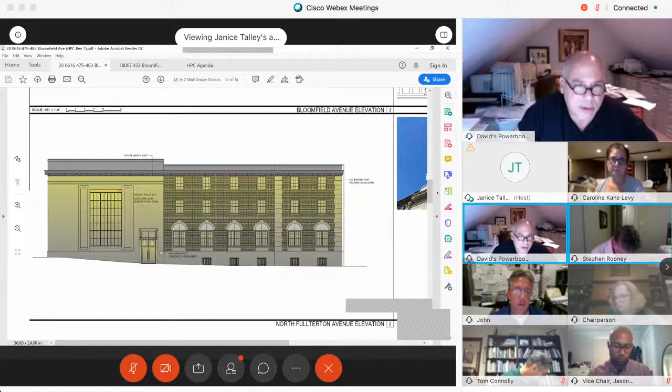Right, okay. Again, my concern is that there is a very clear respect and honoring of the horizontal plane of the window mullion on the Bloomfield Avenue side, and also the top of, I guess there's going to be some kind of reveal on that opening. It looks like where you have the surround of the door, the molding around it. There's a raised molding, yes, it's steel. The outside is steel. So all I'm saying is that steel, I just want to make sure you were considerate of the alignment of the top of that with the top of the awnings, and just want to make sure that was all thought through.

Yeah, David, I'm looking again at this existing image on my screen. The existing window that's there is perfectly aligned with the limestone. It doesn't cut the limestone in any way. It fits right underneath a full limestone piece, which happens to, and I'm sure sensitively done historically, align with the windows to the right. So we're not going to go up anymore so that we don't interfere or end up cutting the limestone in half and having this weird opening. We're going to maintain that height and widen it and bring it down, which would keep it in line with the existing windows to the north.

Right, the horizontal. Yeah, I just want to make sure it was thought of en suite and that it was considered. No, David, it was very specifically done that way. So what you're asking for is in fact what was designed. Yes. Good. All right, well it just goes along with the opening that currently exists, that you're not making it any higher, you're just making it wider, correct?

Correct. We're also matching the height of the bottom of the mullions to the same as the windows, so it's respecting the vernacular to the right. And also the canopy should be following that alignment, and it seems that you have done so. It centers on that mullion, yes. Okay, okay, all right, thank you.

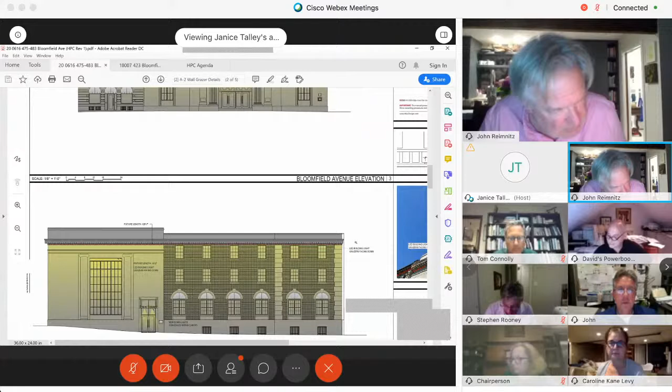So I'm not sure I understand why you can't put the entry there. I understood this thing about the three-story space, but you can cross over to that three-story space inside, I believe.

As far as the lighting's concerned, my comment is I would still do the uplighting on the little piece of trim that I suggested. I would bring it around the corner on the stone building and stop. I don't think we should light up the painted brick, because the cornice and the details above are what makes this building special. Our guidelines suggest we should celebrate cornices and so on. So those are the two big things.

Those are my comments. Caroline? Okay.

I'm okay with the door location, but before I say anything else, I want to congratulate and thank you for adaptively reusing these buildings. I was very concerned when Chase moved out. I thought we'd have white elephants sitting on the corner here, and that it would be years before anything happened. I'm really thrilled this is going to happen, and I think what you're doing with them is a fantastic program.

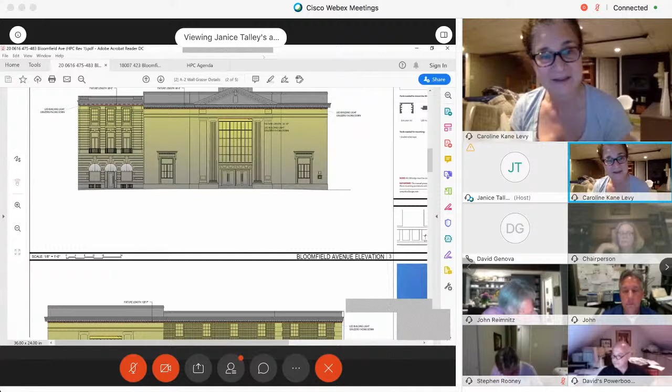Thank you. I just want to say the doorway as proposed for the barrier-free, accessible entrance is acceptable in my eyes. I think it's simple, plain stone, the limestone and the granite, and lowering the sill of the window there. The canopy is going to be fine, and a nice sign for the main entrance to this portion of the building.

I do think the signage should be reduced a little bit. It can't be approved as shown because it doesn't meet our ordinance. If I misread the signing ordinance, the intent was to come in with conforming signage. We must have misread something, and we're happy to limit it to what's conforming — that would be 6 inches. Yep, we're okay with that.

Okay, great. With regard to the windows and their configuration on the North Fullerton facade, I would try to look for some evidence as to what the original design was. I'm looking at the report from 2010 when the windows were replaced — the steel windows being replaced were 1/1 at the time. So if that's an indication that was the original...

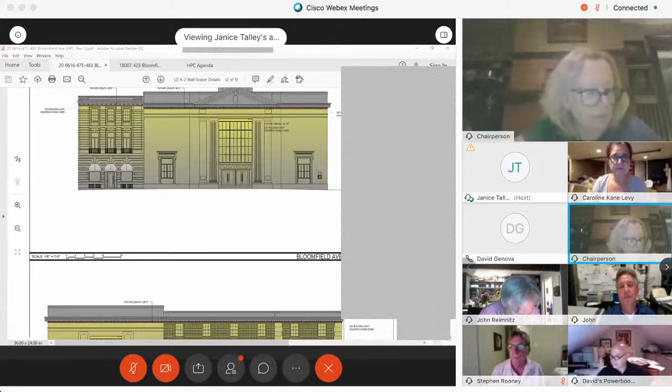Okay, has everyone given their opinion? I just want to add one comment about the surround around the door on the North Fullerton side. I understand that's going to be steel — is that correct, Mr. Buckle? Yes, it is, it's going to be black steel that runs around. What about making the steel the color of the facade of the building so it doesn't draw as much attention, with the inner part being black?

One of the things we were also trying to do is differentiate it from that part of the building, so that it's the entrance to the building, to the right a little bit. So the thought was it stands out. The way that you're trying to limit it is pretty important to me from a tenancy perspective, to make sure we're driving people in the right direction. We didn't want to take up any of the beautiful facade, but we wanted to make sure people understood where they were going.

I'll let my colleagues comment on that. I understand your need, and it's certainly a reasonable need. Then the question is, going back to what John said about the idea, I thought having the frame on the outside not stand out as much. Can we go back to that facade? Could you scroll down? I think it's below, if you could scroll down.

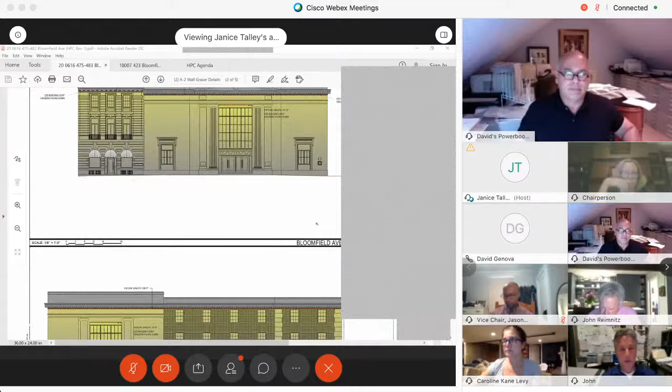So I just want everyone to visualize, you have in this drawing, you don't see it shown here as translucent, but if that's black, that's going to be really, really prominent on that facade. And while I don't mind the inner frame, and even perhaps the suspended canopy and the frames are all black, and the struts for the canopy will all be black, so it's like one unit in unity. Well, I'm just putting it out there.

I'll let my colleagues comment on it. I feel that the surround, the surface that is flush with the face of the building, should rest on the building, not any of the appendages. Ideally, my gut feeling says if that matches the building, it will be more harmonizing. And yet, by having the contrast, just like the window frame mullions are contrasted, it's more consistent with that. I'd ask my colleagues to give their opinion on that.

Well, may I just interject? Is this something that, because I don't think this was really fleshed out on A4, you gave us a picture of a similar one. I don't think it's been fleshed out anywhere on anything we've seen. So is this something you could do more of a mock-up of and hand back to the revisions committee with the color as well? Yeah, we can do that.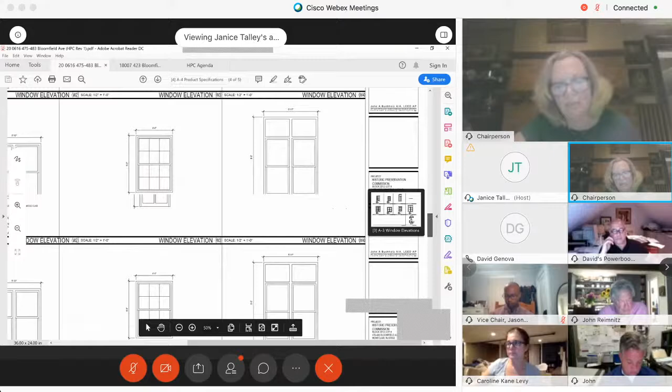Because we've already established that if the location stays, the height will remain the same and the width will just be wider. I also noticed something on your plan, somewhere on that drawing, it looks as though you don't quite have the proportion of the door lined up with the canopy. It looks as though the door and the part above the canopy are almost the same in terms of percentage, seems like 50-50, and I think that's something that would have to be looked at more closely.

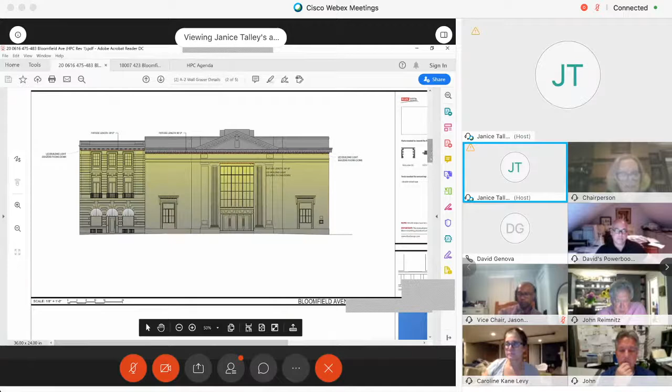I'm not sure what the 50-50 was, just in terms - can you go back to the page? Page one, not this one, go to the one where you actually show that, the blow up. It's on page A1. A1's not showing on my computer for some reason. Is it the bottom, Janice, of this? I can show this, I can show A2. Yeah, that's good, right there.

You see how the door is very squat? And then on the top, you've got this huge transom. The proportions don't work. But Chairperson, we just spent some time talking about how those mullion lines match up with the windows all to the right. And David had - I'm sorry, I was thinking he was speaking about the top.

Well, the top end, right. Well, what is the height of that door, the actual physical door? Do you have a dimension on it? Seven foot. I mean, maybe just because of the monumentality of the building, maybe if you made the doors taller so that they lined up with the first horizontal mullion as opposed to the bottom of the window frame. That would be pretty tall. Or too tall? Okay, all right.

I think they've tried to line things up with the bottom of the window to the right. Right, and to the center of the double hung. I agree, and to the top of the double hung. I don't have a problem with that. But how do you feel? I do agree with David about this black steel element. I think no matter how you build this thing, it's going to be an intervention.

It's going to be obvious that it's new, whether it's black steel or another material. I would tend to make it out of the same limestone and then have a canopy coming off of it, doing the infill with the black clad elements. But my issue with the black steel is that you're introducing a different aesthetic language into the building, and it's very prominent. Even though I know what you're trying to achieve, David, and I'm sensitive to that, I think it should not contrast with the building—it should be a reveal that brings out the facade.

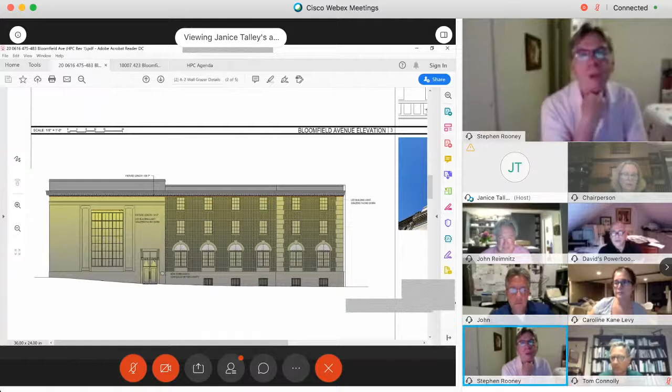Okay, so the consensus is that all these windows will be replaced on this facade and the back with a 1/1 configuration. Is that what you thought five minutes ago? That's what I said. We all agree with that, Dave, except you. No—for some reason, looking at the picture, I thought that was already accepted.

Okay, so we've discussed the windows, now the lighting. Can I make a suggestion with the lighting? I don't have so much a problem with the lighting glancing down the building, but can we do uplighting—two-way lighting—so we actually see the dentil work and the carving of the pediment? There's interesting work inside that pediment that no one sees, but if it's lit up, it'd be great.

Short answer is yes, John, we can do that. But can the uplighting be done on the brick part as well? I would not—I'd just have downlighting on the brick part. So it would be uplighting on the limestone, and downlighting on the brick. Okay, great.

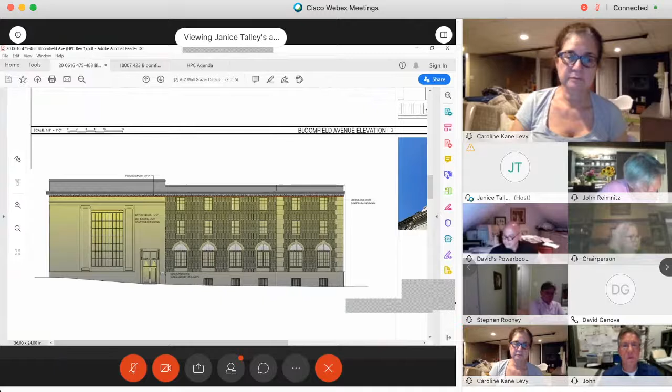If I can just speak on the ironwork for a minute before we get too far on that point. To Ms. Levy's point, and I appreciate your comments about preserving this building and trying to do something sensitive to it, there is a challenge that exists when looking at bank buildings. It's similar to looking at church buildings. I found that architects and designers and people who are really aesthetically sensitive find all the beauty in these buildings, but sometimes forget that they were very purpose-built for what they were. One of the challenges in finding tenants in these buildings is convincing people that they're not working in a bank or living in a church, or coming into something that wasn't thought of and thoughtful for them.

I've had a lot of challenges over the course of my career convincing people that offices with ironwork on the outside, whether it be just bars or more decorative ironwork—albeit this is one of the more decorative ironwork jobs I've done—I really do think it would be a challenge to find a retailer that doesn't ask me to remove that ironwork on the front. And on the Fullerton side, I know our office tenants there will have issues with that. I'm sensitive to the fact that they exist and that they are beautiful, but I don't know that I can live with the condition of leaving them in perpetuity. I'm happy to remove them from this application on the front if that satisfies everybody, and come in with a more cohesive application once we have a retailer. But I don't know that I can live with that condition of just never removing those bars.

Well, I think if you want to remove them, you'd have to come back before the commission. So putting it in as something we're going to do in perpetuity, saying they will not do this, is a little bit of a challenge. I will withdraw the front ones from the application if they're not noted, so that if I'm not the owner of this building, or if anything moves forward, someone has a fresh palette on that—because someone's going to have to come in and get signage approved, or something on that facade will likely change if there's a retailer. And I want to preserve their flexibility to re-present to you a cohesive message for whatever that tenant is. Just to be clear, it would be beyond this board's or this commission's power to put that condition. So it would only apply to this application if that condition was imposed.

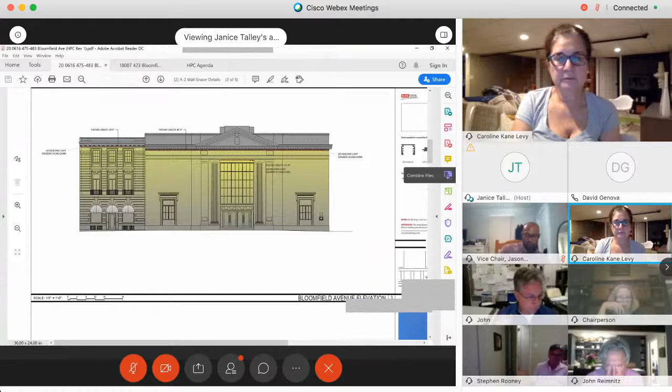And to make it clear, when I spoke before, I said there's a clear difference between the bars on the brick addition—which truly look like bars on the first floor, not the basement, but the first floor—and the ironwork on those three windows, which I think is quite spectacular. I wouldn't want to see that go. But bars on the windows on the first floor—if I can interject, the architect, if he had not designed this for a bank, I can guarantee you those bars would not be there. They would not have been placed by the architect of this building. Yeah, that's really the point for us—we want to be historically sensitive, but we don't want to maintain them; it's hard enough to turn banks into other uses. This is a challenge for us on that front part. I think it's important to the eventual use of the building to replicate. And by the way, I believe—I don't want to say authoritatively—that the same thing existed up the street at 491, and those have been removed. It makes it feel more like a building.

David, did you offer to keep the bars on the windows on the front of the building for now, and then readdress that when you come back? I will. I will remove them from this application. I just don't want it to be noted in the application that it was rejected in some way, so that no one feels that way—so that we can get a fresh look at it when we have a cohesive look.

I will not remove them as part of this. I'm just hoping we can memorialize that in a way that isn't that they were voted down. So just say for now, David, that you're going to leave the ironwork on the front two windows and the big side window, period. I will commit to that. We won't have to comment on anything else at this point in time. Great, okay, great.

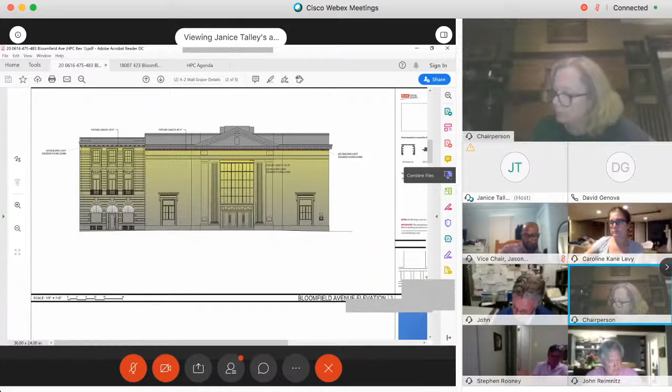Okay, so Janice, could you read back? I think we have five. Yeah, I have four. All right, condition one: all the windows on the North Fullerton side and the rear will be one over one.

Two, the lighting plan will be revised to include uplighting to illuminate the top of the building. This will exclude the brick portion of the building, and the downlighting will remain. Three, the applicant will revise the size of the letters on the awning to six inches or less.

And four, the ironwork on the front two windows and the large side windows will remain. Now, there's the surround on the new opening that has to come back to the revisions committee. The materials. Okay, and while we're here, we never really addressed the arched windows on the first floor on the North Fullerton side.

There is a transom there now. Will that be clear glass, or will that be right there, which you won't see?

That will stay as an aluminum panel the way it is now. Are you going to keep it? It's painted though, isn't it? It's a painted panel - I actually don't know if it's aluminum, I apologize. It could be another material, but it is not glass now, and we would maintain it in its current form. It would be covered by those awnings, and it would stay that way.

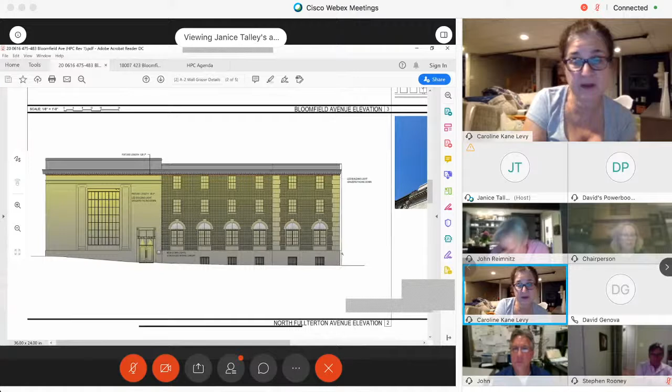Okay, so Jason, now we have all these conditions for the C of A. Are you there? I'm here. Okay, so will we move forward with this now? Yeah, do we vote on this now? Someone has to make a motion. I think we've gone through the conditions - motion to approve on both, with the stipulations, with the conditions stated.

Right, second - okay, second, I second. Wait, who made the motion? Steve - I did, Steve, okay. And who seconded? Jason. John or Jason? It's okay, only with a J.

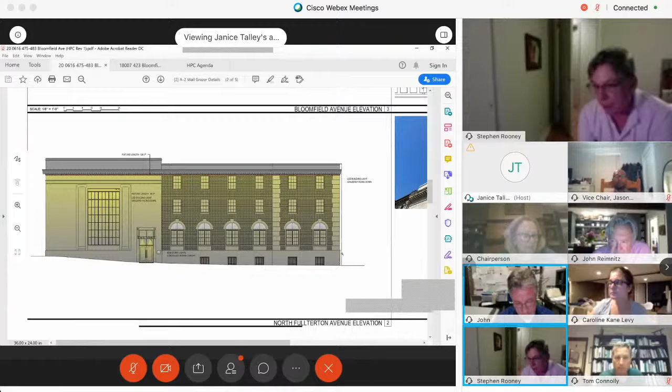All right, I'm going to do a roll call. Mr. Hyman, aye. Mr. Rooney, aye. Mr. Greenbaum, aye. Mrs. Kane Levy, aye. Mr. Reimnitz, aye. And Chair Bennett - yes. Okay.

Thank you, guys, I appreciate this. Okay, thank you. This is going to be a great addition. Yes, that's great, thank you. I hope you guys are pleased with our work on the vestry - that was an important one that we came in front of you for, and I hope it turned out as well as you thought it would. Yeah, the building looks great. Yeah, building looks great.

Thank you. So, Chair Bennett, we have another application tonight that we really have to hear because the public hearing is scheduled for Monday night before the planning board. Oh dear, okay, let's go. Are you serious? Why is that? All right, that's just bad.

Hold on just a second. I will be recusing myself from this portion of the meeting. Right, we have Barton Ross here, I believe. Barton, are you still here? Where'd he go? Yeah, I'm still here. No, he's not on - no, he's still here, I see Barton's here. There he is, there it is.

Paul, go ahead. So Scott and Pilar Kennedy are the owners of the property, and they're also owners of the business on the first floor, which is Studio 042. There's an apartment at the front of the building that will remain as it is. The property is located on the north side of Bloomfield Avenue, just to the west of North Willow Street and to the east of the Glenridge Avenue, Bloomfield Avenue intersection.

Janice, could you pull up the next slide? Yep. I don't know why my computer is trying to close down all my other applications.

Paul, did you send, the first slide was what is on Barton Ross's memo, but do we have anything else? No, you don't have any of these. Oh, no, okay, yeah, I can't even go to the first page now. I can't explain why my computer won't show all these items. But anyway, Paul, go ahead with your presentation. They have the plans. I don't know what to tell you, if my computer can't open it, there's not much I can do at this point.

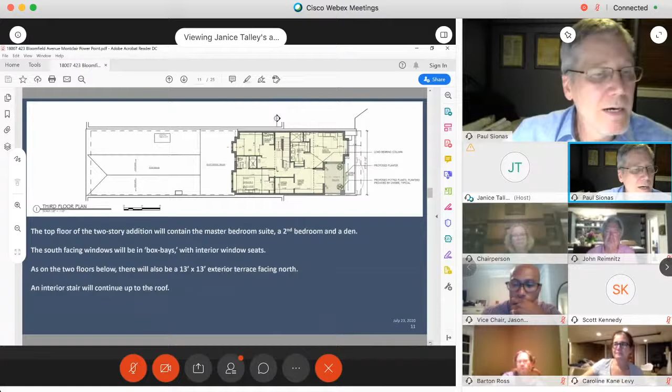The floor above that has the master suite, a second bedroom, a den, and an additional terrace. As the building goes up in height, it steps back from the facade along Glenridge Avenue, so just as on the floor below, there'll be another 13-foot by 13-foot terrace. Additionally, there'll be a new interior stair leading up to a rooftop deck. Next slide.

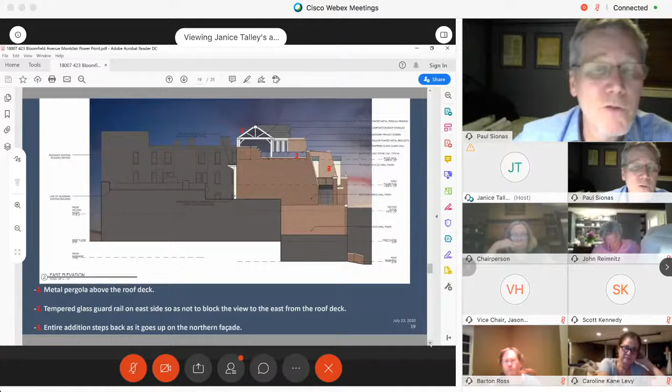This is the east elevation. It shows the metal pergola above the roof. As part of that roof deck, we calculated there'd be a terrific view of the New York City skyline above the new parking deck. Where it has number 2, that's a tempered glass guardrail wall along the eastern elevation, so residents can enjoy the roof without an impeded view of New York City. And as number 3 shows, the addition steps back as it goes up on the Glenridge Avenue side. Next slide, please.

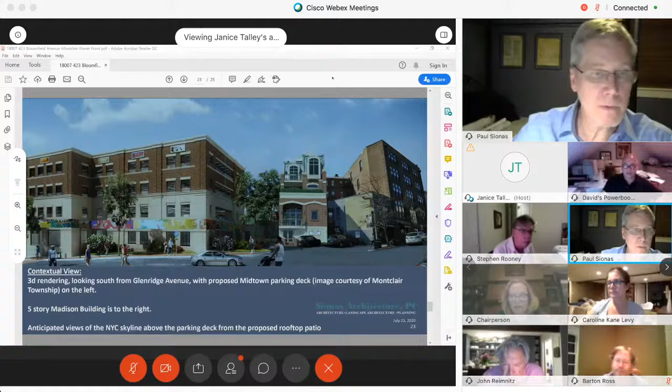So that is our last item. So do we turn it into some sort of recommendation? Okay, right, and then it goes to the planning board, and Mr. Rooney will be there at the next meeting. Janice, when does this go? Next week, Monday night. Yes, Monday night. So Mr. Rooney will be there so he can speak to it. And thank you, Barton, for writing the memo for us.